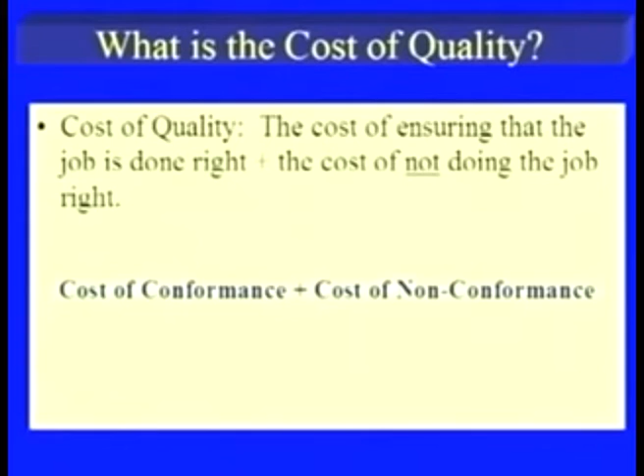To summarize, the first part of cost of quality is the cost of conformance, and the second part is the cost of non-conformance. The components are like this: cost of conformance includes prevention and appraisal cost, while cost of non-conformance includes internal as well as external defect cost.

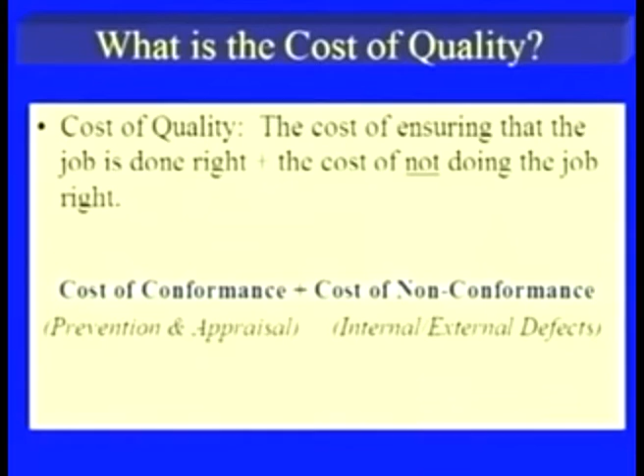The definitions of all four components of the cost of quality are here. The first is the prevention cost, the cost of planning and executing a project so that it is error free or within an acceptable error range.

The second component of the cost of quality is appraisal cost, that is the cost of evaluating processes and their output to ensure quality.

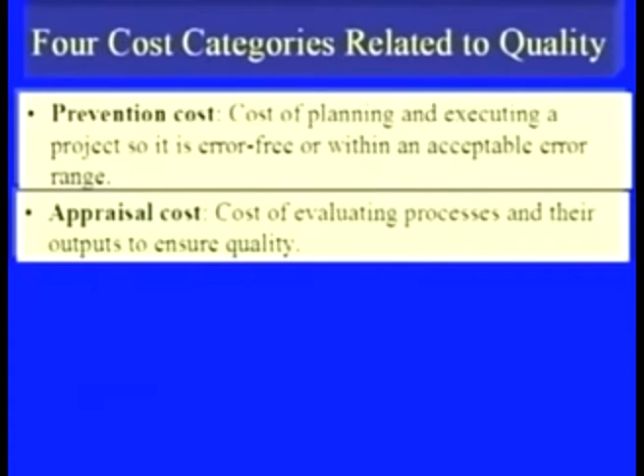The third portion of cost of quality is internal failure cost, the cost incurred to correct an identified defect before the customer receives the product. The important factor here is that we need to be careful in deciding this cost. Once we say identified defect, this means we are doing some inspection and finding the defect. So not only should we find the defect, but we need to correct it, and whatever that cost is, it is counted before the customer receives the product.

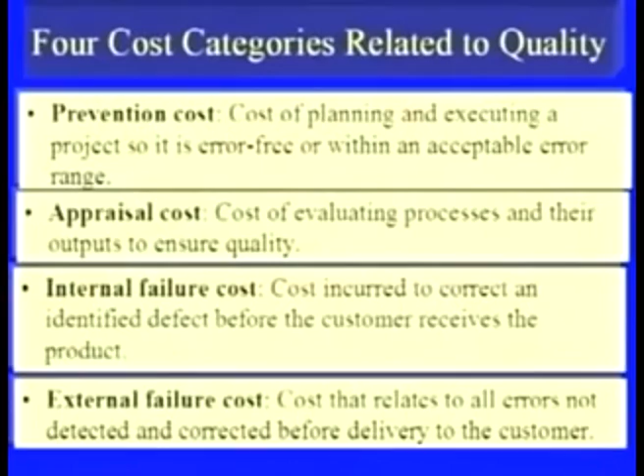The external failure cost is the cost incurred when the product has been shipped to the customer. When the customer starts using it and finds there is some problem, whatever cost he spends comes in the category of external failure cost. This is the cost related to errors not detected and corrected before delivery to the customer. This cost has a multiple effect: not only does the product come back to the organization for rework, but it also spoils the image or goodwill of the company.

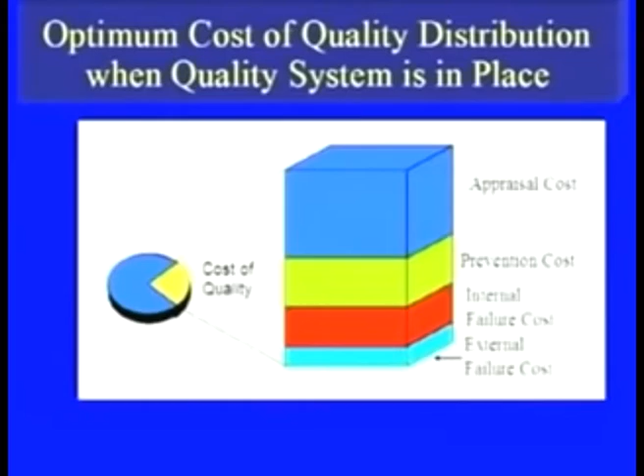So once better quality is there, productivity is there, certainly the profit the company will earn is much higher than the company which is not having the quality system in place. With the background of understanding of cost, quality and productivity, let us talk about the evolution of quality.

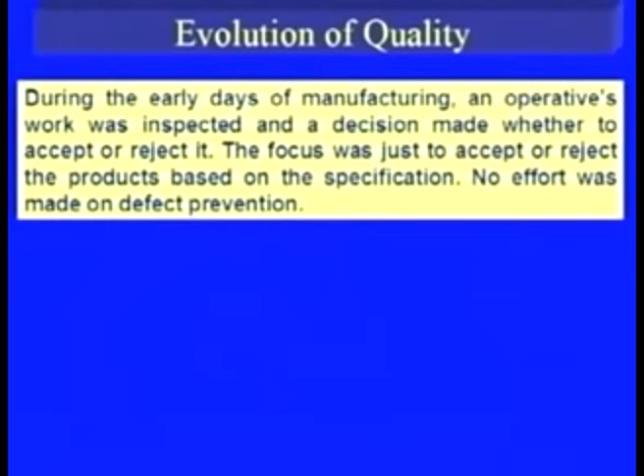During the early days of manufacturing, an operative's work was inspected and a decision made whether to accept or reject it. The focus was just to accept or reject the products based on the specification. No effort was made on defect prevention. The total output was based upon the inspection.

Inspection basically is an audit tool. It is not about building quality into the product, it is just auditing good or bad. So when the product is produced, the inspector used to inspect it and say it is good or bad. Bad products were sent back to manufacturing for rework or scrap, and the good product was delivered to the customer. There was no effort in finding what was causing the bad products. That is why there was no effort on defect prevention.

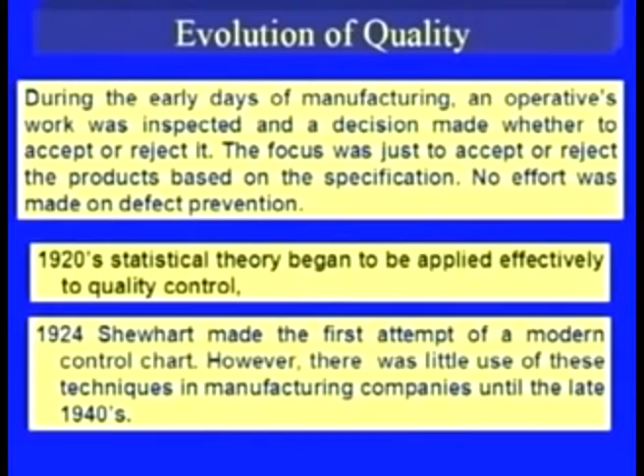In the 1920s, statistical theories began to be applied effectively to quality control, and Shewhart in 1924 made the first attempt at modern control charts. However, there was little use of these techniques in manufacturing companies until the late 1940s.

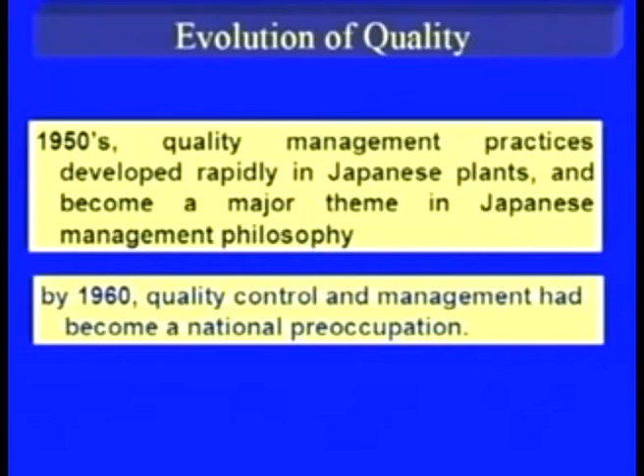In the 1950s, quality management practices developed rapidly in Japanese plants and became a major theme in Japanese management philosophy. By 1960, quality control and management had become a national preoccupation. In 1969, Feigenbaum used the term total quality for the first time, and in 1970, Ishikawa used the term company-wide quality control. In 1980, total quality management came into existence, and as we move into the 21st century, TQM has developed in many countries into a holistic framework aimed at helping organizations achieve excellent performance, particularly in customer and business results.

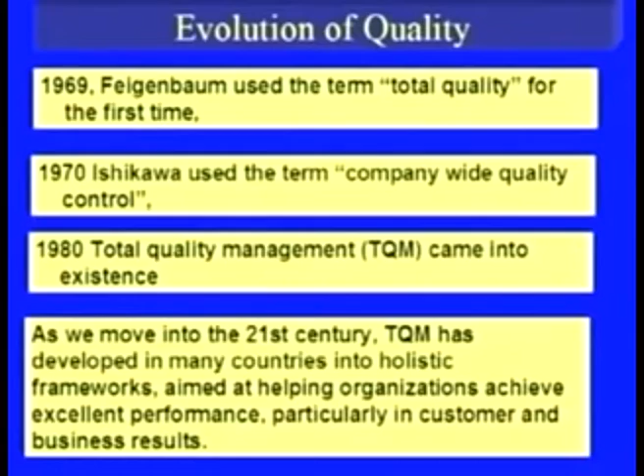This evolution of quality, seen in historical perspective, can be divided into four parts. First, as mentioned, in the early days of manufacturing the focus was on inspection, with no effort to maintain quality regarding prevention of defects. Second is statistical quality control, third is quality assurance, and fourth is strategic quality management. All these focuses were seen with a different primary concern, view of quality, emphasis, and methods used.

If we see the inspection stage, during the early stage of manufacturing, the primary concern was detection of scrap, detection of defective products or defects. There was no effort on the prevention aspect. The view of quality during that period was a problem to be solved, with emphasis on product uniformity, meaning every product in the customer's hands should be uniform and perfect. The methods used were gauges and different measuring instruments, calipers, to check whether the product was made as per specification. The focus was on the specification, not on building quality into the design of the product.

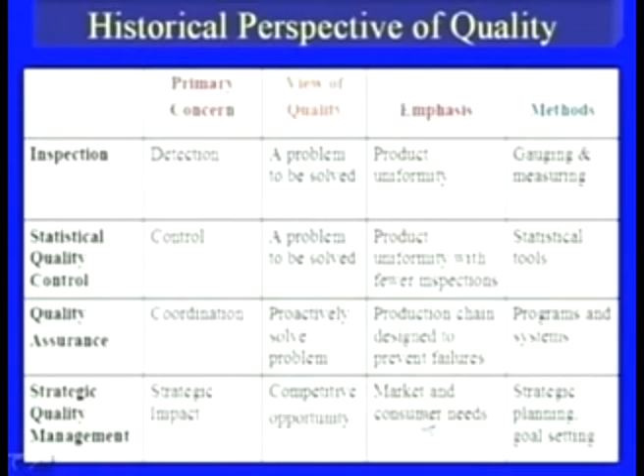Tailor made solutions are coming up nowadays. People are basically driven by the customer. Earlier, whatever products were available, the customer used to take it depending upon their requirement, but now the demand is basically driven from the customer.

Methods used were strategic planning and goal setting. So this is an overview of the historical perspective in the evolution of quality, starting from inspection to strategic quality management, with different concerns from primary concerns to the methods.

Dimensions of quality. Whatever we are saying about the dimension of quality, let us see what we think of quality. There are various ways we can think of quality, as Garvin has mentioned - he has given the 8 dimensions of quality, showing that different people see quality in different ways.

Garvin has mentioned performance as one of the aspects or quality characteristics that a person can see, depending upon the customer - he may be thinking of the quality in terms of aesthetics, or different points. Some people think about the specification, some people only focus that the product should perform well.

So the first dimension that Garvin has given is performance, and the question we can ask is: will the product that we are getting, or the product that we are manufacturing, do the intended job or the required job?

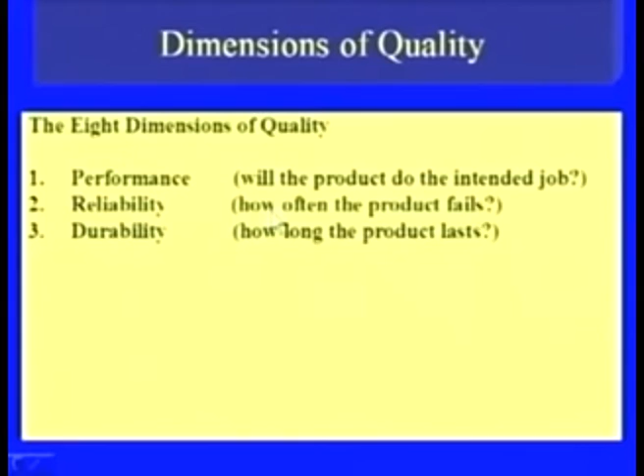Serviceability - how easy it is to repair the product in case there are small or little failures. Aesthetic - what does the product look like?

Features, what does the product do? This means sometimes not only the performance, reliability, durability - there are different similar products available in the market. Some products have few features, some have additional features. Whatever additional feature we are getting, that basically appeals to us.

Conformance to the standards, whether the product meets the specification. Sometimes the customer specifies that the product should have that much tolerance, that much specification, this much strength, etc. So whether the product the customer ordered meets the specification as he has specified.

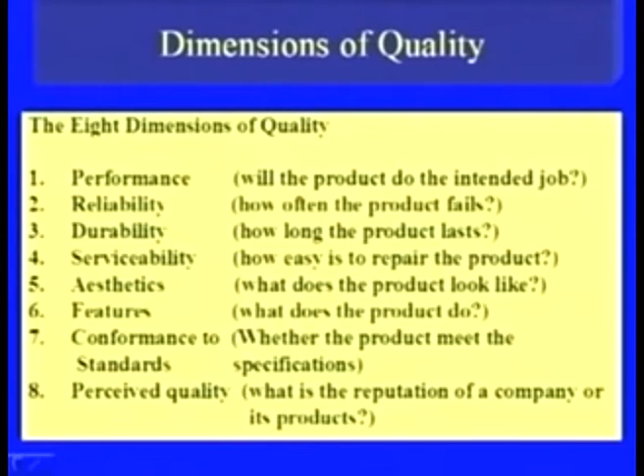And the 8th dimension is the perceived quality. Perceived quality means what is the reputation of a company or its product, that is goodwill. Sometimes we have in our mind that whatever product we are buying is having good quality, or the company's image basically goes with the product.

So these are the 8 dimensions, and it depends upon the customer, depends upon the person, whether he is looking for 1 dimension, 2 dimensions, or all 8 dimensions of the product, and whether he is equally satisfied with performance, reliability, durability, serviceability, etc. Maybe sometimes a person goes for only 1 or 2 dimensions, like performance and perceived quality - he is only looking that the company should have good quality and the product should perform well, so he may not bother about how long the product lasts. Depending upon the requirement, a person can have different dimensions of quality.

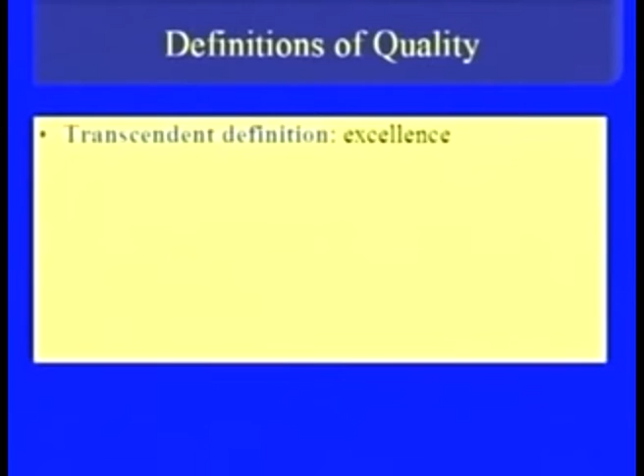Coming to the definition of quality, there are 5 different ways we can define it. The first is the transcendent definition - everything that is excellence, in all the aspects, across all 8 dimensions I mentioned. The second is the product based definition - quantities of product attributes.

The product may have 1, 2, or 3 attributes, depending upon customer requirement. If the customer is looking for more attributes, another definition may apply. The third type of definition is the user based definition - fitness for use, fitness for the requirement, whether the product is fit for my use.

Fourth is the value based definition. Sometimes we not only check the quality of a product, but also the prices, and try to make a trade-off between quality and price. Sometimes we have good features, good quality, good performance, but the costs are high. In such cases, if price is the prime concern, we have to think of another product.

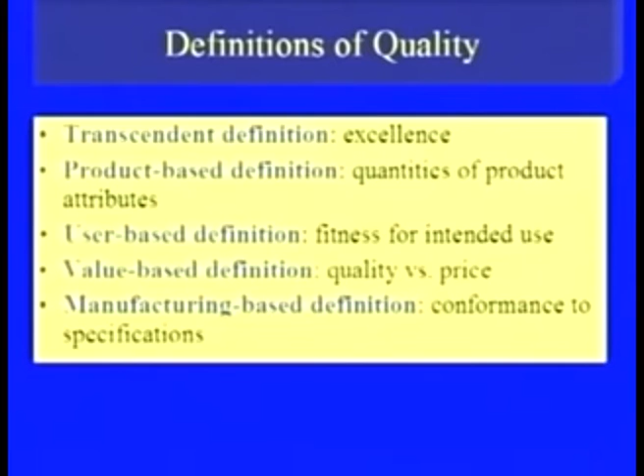So some people go for the value based definition, and the fifth is the manufacturing based definition, which people used to use earlier - conformance to specification, whether the product being manufactured meets the specification provided by the designer. These are the 5 different ways we can define quality, and there is no unique definition - it is the individual's perspective on how he looks at quality.

This is a traditional definition - quality means fitness for use. This is given by Joseph Juran.

The customer driven quality, as per the American Society for Quality Control (ASQC), is the totality of features and characteristics of a product or service that bear on its ability to satisfy stated or implied needs of the customer.

This means meeting or exceeding customer expectation. There are different companies that just focus on meeting customer expectation - the customer is satisfied. But when you give some additional features, something extra that the customer was not expecting, that means wow quality. So there is a difference between meeting and exceeding customer expectation.

When the customer buys the product and is satisfied, he is a satisfied customer. But once you give the product with additional features, something the customer was not expecting, that means customer delight - the customer feels delighted in buying and using the product.

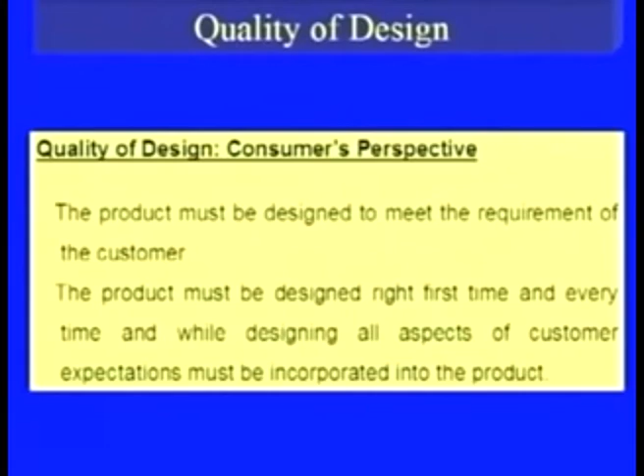This definition basically changes the focus. Earlier people were only concerned about manufacturing. Now people think that instead of looking downstream at manufacturing and subsequent stages, we should look upstream. When we look upstream, the focus should be on design, where the marketing person from the market, when they go for a survey, contacts the customer and tries to capture what the customer wants.

They try to capture the voice of the customer through various means - they go for surveys, they check warranty records, they go for individual meetings with the customer. When they meet, the customer tells them what they want. These marketing people then understand what the customer actually requires, and they give the entire detail to the product design section or the designer.

So when the product design persons design the product, it is their responsibility. Suppose as a designer I am designing a product, and if I think I am expert in all areas, I cannot manufacture the right product.

Suppose if I try to design a product, and I think that since the customer is asking for very high strength, I will suggest a certain material that is very good, that delivers high toughness and high strength, etc. Then when this design goes to the manufacturing people, they may say that the material you are specifying, we do not have any machine to machine that particular material. The machining of that material is not possible.

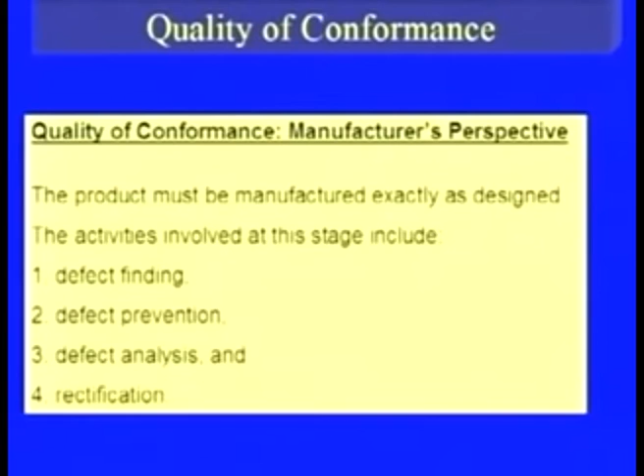The activities involved at this stage include defect finding, defect prevention, defect analysis and rectification. So as per the manufacturers, their focus should be that whatever specifications have been provided at the design stage, the manufacturing people should provide exactly the same way.

If, for any reason, the tolerance or specifications are not meeting as per the specifications, the first step in the analysis should be defect finding - carefully finding the defect and why this is happening. Once you know what different types of defects there are, then comes the control phenomena - how to prevent these defects.

So we need to find out the reasons first, then find out where the control mechanism is, and try to prevent all these defects - and this is possible only if we go for defect analysis. Once we find the defect, we analyze it, and then only can we prevent it. Our purpose is not only to prevent the defect, but rectification in the processes, so that the process performs all the steps necessary to produce the product in the right way, first time and every time.

Continuing with quality of conformance - sometimes the difficulties encountered at the manufacturing stage must be conveyed to the designer. As I mentioned earlier, it is possible that the designer recommends a tolerance of plus minus 0.003, up to the 3rd place after the decimal, but the manufacturing section does not have machines capable of delivering such tolerances.

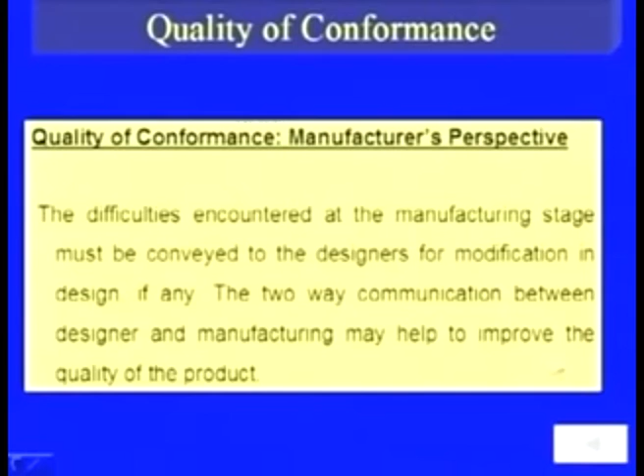The third aspect that we are now going to discuss is the quality of performance. The product must function as per the expectations of the customer.

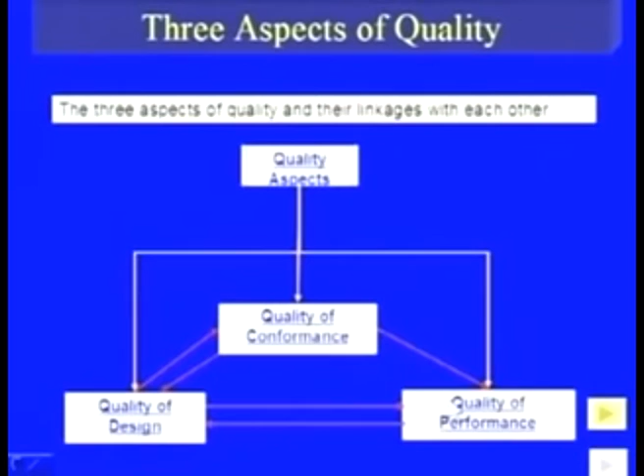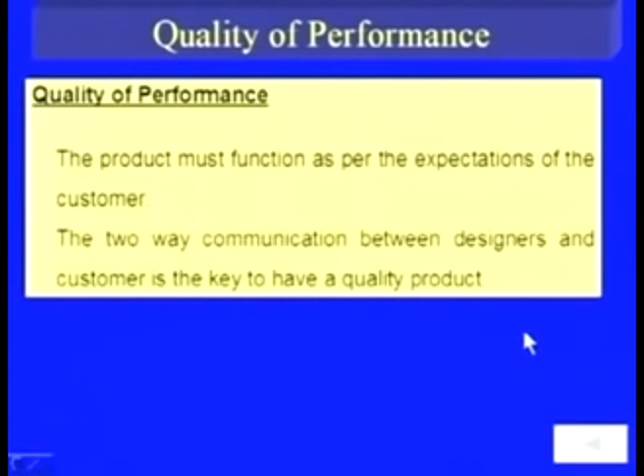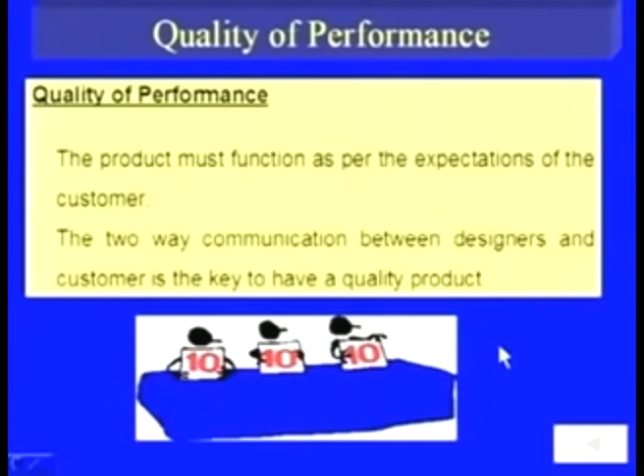So once we have all these three aspects - quality of design, quality of conformance, and quality of performance - in all cases we need 100% perfection. Our design should be 100% right, our conformance to specification should be 100% right, and the quality of performance should be 100% right. That is, we should get 10 out of 10 in all three aspects of quality. Then only we say that our product meets the expectation of the customer.

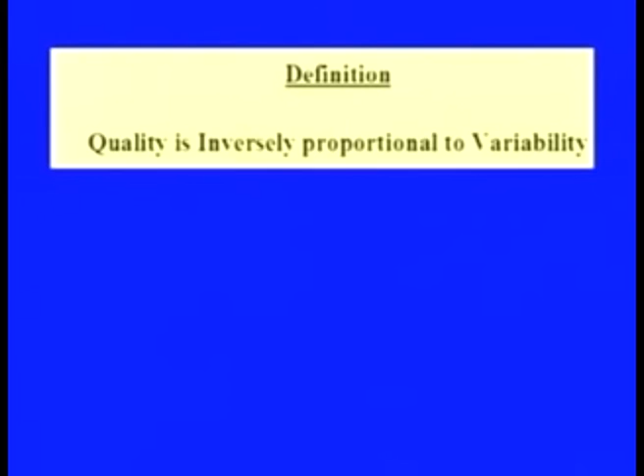We have talked about two definitions earlier - that quality is fitness for use, quality is what the customer wants, or exceeding the customer requirement. This is another definition, the modern definition of quality: that quality is inversely proportional to the variability. This variability means variation - higher the variation, poorer the quality.

So this variation basically comes either from the processes or from the product. As far as processes are concerned, we need to control the processes. Every process, every machine, every person has inherent variation. This inherent variation is basically the evil that creates the problem. ISO 9000 is the answer to it.

The answer that ISO 9000 provides is that it is a totally documented approach, and its focus is that whatever you do, you document it, and whatever you have documented, you do it, and once you follow this, you follow it consistently. Now the question arises whether whatever we are documenting is right or wrong. If we have documented the wrong procedures, we are following the wrong procedures consistently.

So that should not be the approach. Before documenting, we need to standardize the processes, we need to standardize the method, we should document only the right methods and right procedures. Once the procedures have been standardized, the total documentation should be there, and whatever is documented we need to practice. The focus in ISO 9000 is basically that irrespective of the person or the system, whosoever does the job, if he follows the documentation, the quality of the product will be exactly the same as was done before.